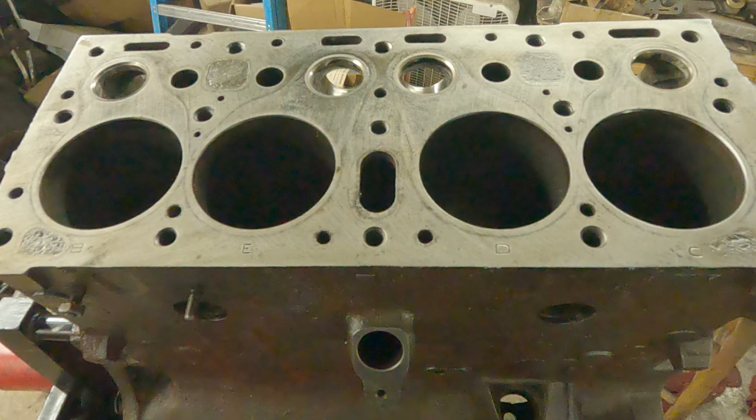Now we're going to go ahead and do the inspection. I've already inspected everything off camera, so I'm just going to go over the whole process on what to inspect and how to inspect it. Still got to do a little bit more cleaning up on this deck. I had it real nice and shiny, but even after a coat of WD-40 and some oil, it kind of dirtied up again.

The first thing we're going to do is check the deck for straightness, make sure it's not warped. Basically, get a straight edge and put it across in an X pattern, then put a flashlight behind it and see if any light shines through. If you're unsure, get the thinnest feeler gauge you have, like a 1/1000th, run it in there and see if it's all consistent. We'll do the same thing on this other axis here, checking about midpoint of the bores, right after the bores, and then just off the edge. So this deck's perfectly straight, which isn't very surprising. These engines run real cool, not a lot of heat or pressure going through them, and it's a real thick casting.

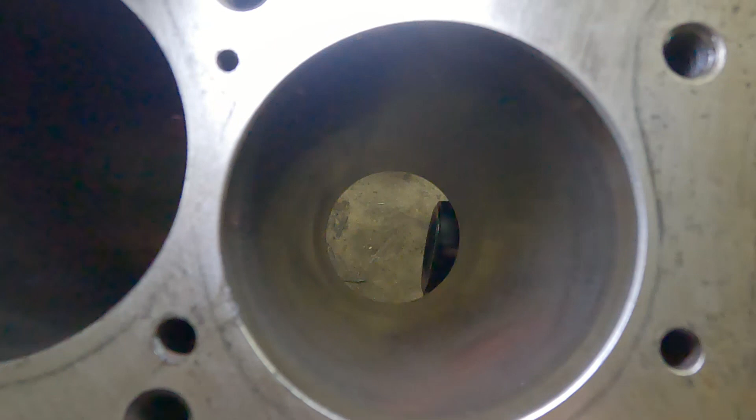Same process now for the bores, just with different lighting. So these bores got a little dirtier. Hopefully... these bores still look pretty good. They're a little dirty, and number 4's got a little bit of corrosion on it, but nothing crazy.

Oh, this damn tripod broke on me.

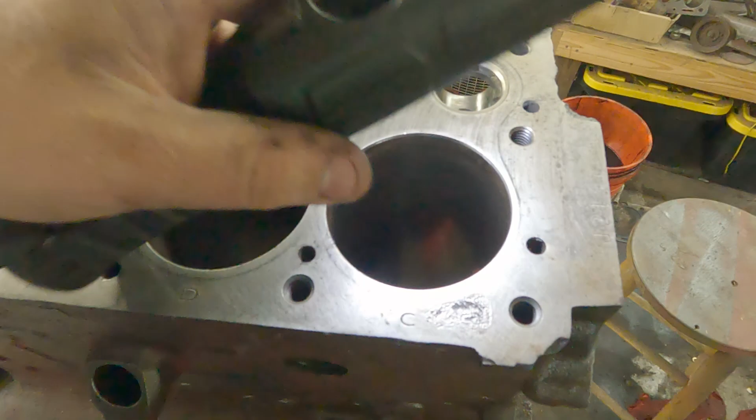Normally when you have a real high mileage engine with a lot of wear, you'll have a carbon ridge here - that's a buildup of carbon sticking out farther than the bore. Let me grab a piston to show you. Here on your piston, your top ring ends right here, so all this is dead space. When your piston's all the way up, only this part up here is exposed, and that builds up carbon. When that happens, depending on the severity, you can hone it out, but in most cases if it's real severe you have to get a ridge reamer. So yeah, these bores look good.

We're going to go ahead, before we start measuring, and inspect the crankshaft, the connecting rod bearings, and the main bearings, and then we'll do measurements.

Here we have the crankshaft, here's the rear. What you want to check for is excessive gouging. I already polished this crankshaft - it had a little bit of gouging, I never filmed it. But basically for wear, if your fingernail gets caught on it, that's normally a sign it's too much. We'll go ahead and do measurements on it as well, but I just wanted to show you this crankshaft's going to be good to put back in without having to take a visit to the machine shop.

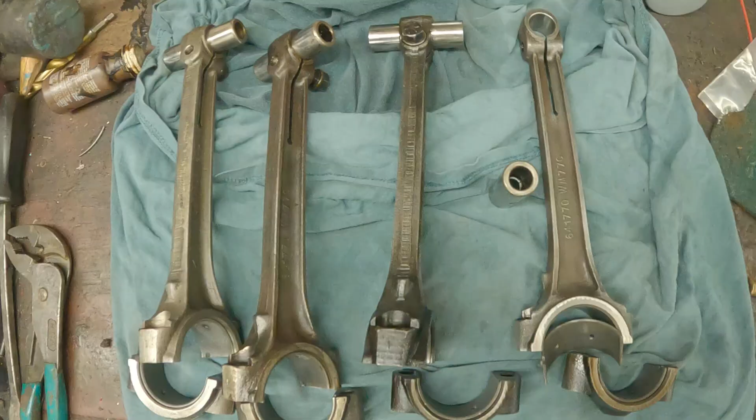All right, so here's our connecting rods. These just came out of the parts washer a little bit ago. Went ahead and cleaned this one twice - these are going to all get cleaned about 3 times. We will weigh these later, the connecting rods and the pistons, just to get a guess on how balanced everything's going to be. But we'll just do a quick bearing inspection.

So this is the rod, connecting rod bearing - this is the one that goes on the rod. Not too bad, looks like the oil was a little dirty. And here's the cap, so this is the bottom. You can see a little bit more dirt damage, no real heat checking or anything, just seems like a lot of debris in there.

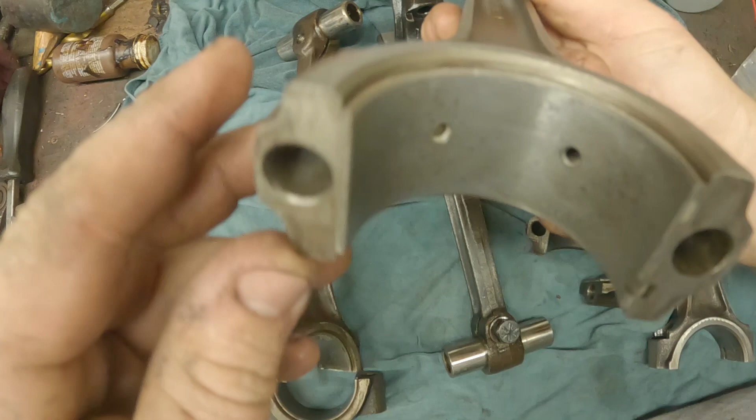And then on number 2, we got a little bit of flakes going on. So it seems like this was a little bit in between oil changes for a while, pretty dirty. And this bearing has a little bit of material missing on it. This one's number 4.

So, and also here's the cap for number 4. You can see where something drug.

But all in all, the crankshaft was okay. It just came out a lot better doing a quick polish on it. So to polish the crankshaft, I just used a buffer with medium fine buffing compound, then went over it with 1000, 1500, and 2000 grit sandpaper, and gave it a pretty good finish.

So moving on, here we have our intake valves. So here's one of them. You can see how much carbon buildup is on there, and also the valve face itself. Not a whole lot of wear on the valve face compared to the exhaust valves. These just don't see the higher heat like the exhaust valves do.

One of the big flaws with the L head and F head engine is, here's the exhaust valve, is the exhaust valve gets cooked in the block. All that heat just holds in the block, and the exhaust manifold's right there and everything. So these get pretty hot, but all the valves are getting replaced.

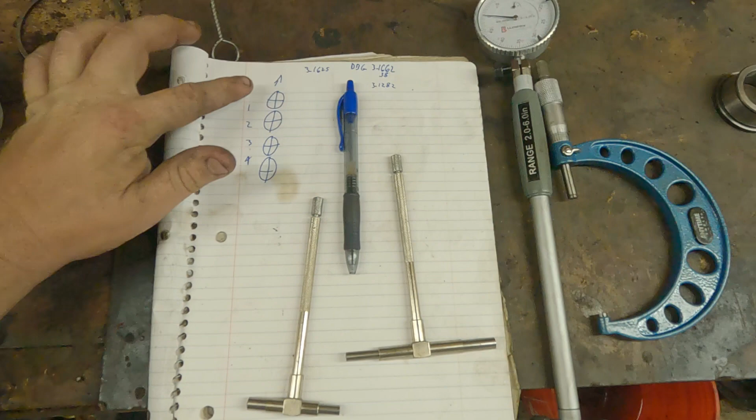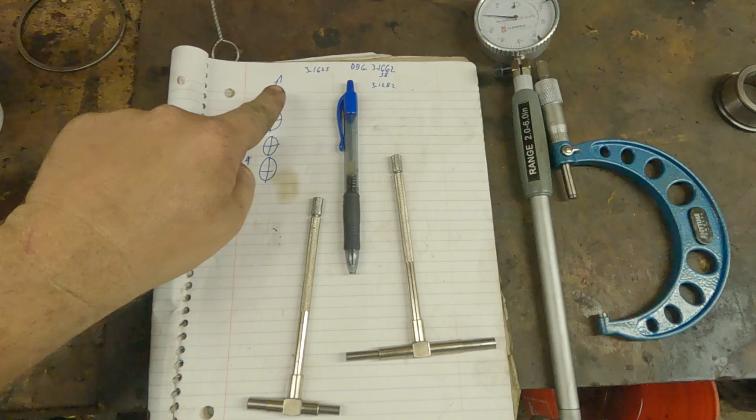Okay, so for measuring the bores, just get you a piece of paper. What I like to do is number it, and then I'll draw out the cylinders. I got an arrow facing front, so we're only going to take an X and a Y axis. So we're going to do top of the bore and bottom of the bore, so I'll add two more sets of circles.

Basically, the tools you're going to need at minimum are telescoping gauges. These come in different sizes, so just find the right size you need. This one's about a 2.5 inch to 3 3/4. These standard bores are 3 1/8, which is standard, so that'd be 3.125 on a decimal system.

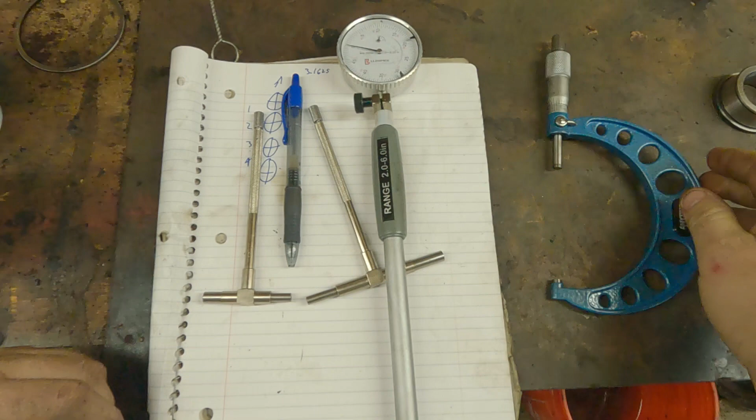Here is a dial bore gauge. You can use this as well if you have it. I'm going to use both just to verify the measurements, so we'll come back to this. And then also a 3 to 4 inch micrometer with a vernier scale that goes down to 10,000ths. That's very important, especially when we're doing the crankshaft and bearing clearances.

So basically the telescoping gauge, I'll demonstrate it again when we go to do it. You're just going to press it in, twist this, and it's going to spring out and hit the bore. You want to make sure it's perfectly straight. Then we're going to pull it out, measure it with the micrometer, reset it, do another measurement this way, measure it further down at the bottom of the bore, spin it. There we go. So we're going to have a total of 4 measurements per cylinder.

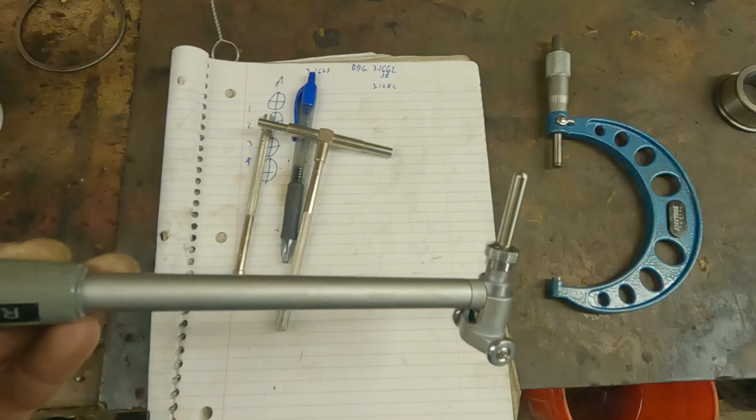So for the dial bore gauge, I'm not an expert on dial bore gauges, so if there's any machinists watching, I'm sorry. But basically you have the standard here. I got some spacers in here, about I think 50 thousandths larger, so I think it's 45, so it's 3.165. But basically what this does is it goes down, springs back, rides your cylinder, and then this is going to move. Your anvil is going to stay, and your dial indicator is going to move.

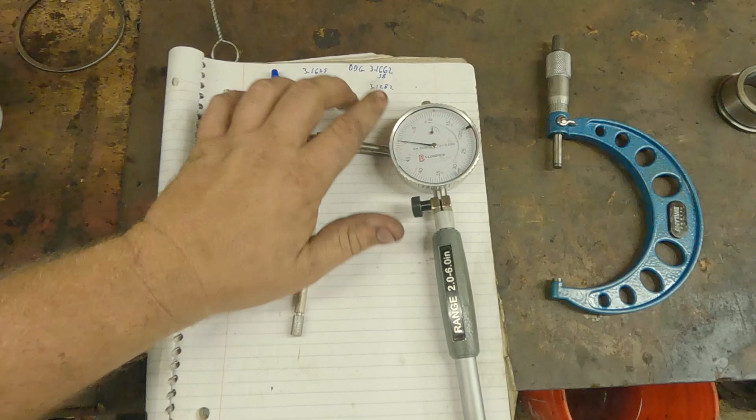So we'll go ahead and use this to confirm, we're just going to use both and I'll explain it. But basically, for me to get 3.125, this will read 40, so we'll subtract whatever this says off of 3.165. I got 6.6, it's about 1,000ths off. It was kind of hard to measure on the micrometer, but 3.165, and then we'll subtract that, and that'll give us our bore measurement, and we'll see if they all match up. So I'm going to go ahead and move the camera, and we'll get started.

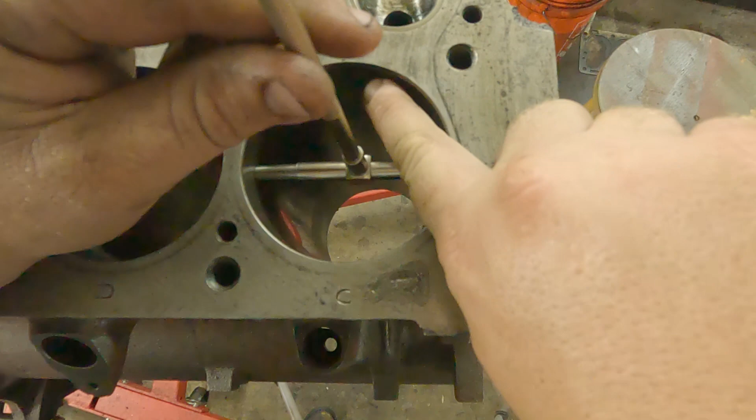Alright, so we're going to start with the telescoping gauge. We're going to get it in the center of the bore, spring it out, and make sure you go past the very top, because remember the very top is going to have no wear on it, or have a carbon ridge. So just go about half an inch off the top, make sure it's straight, move it around, make sure the spring isn't stuck. So we got it straight. It might look a little off center on the camera, but it's straight. And then we got it lined up with the center of the bore, so go ahead and tighten it up.

So now I got my micrometer ready, I'm going to try to do this on camera. It's just tight spaces. So on the telescoping gauges, you just want to do it till it clicks. You're going to use the thimble. So go ahead and lock her down.

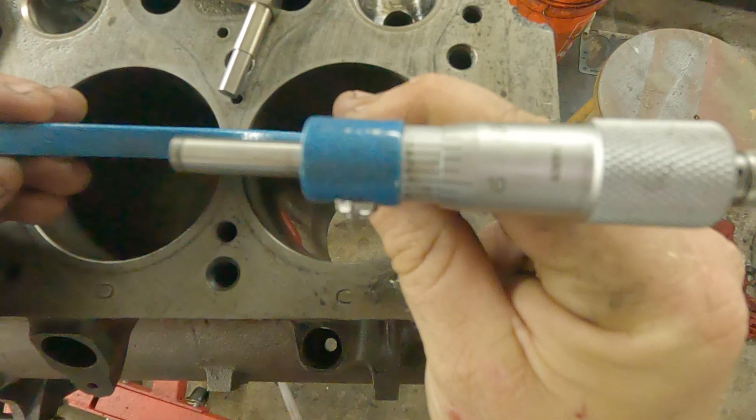So we got 3.12, we're in between the 6 and 7, we'll go ahead and round it up to 7. So 3.127, and then we'll check our 10,000ths. Oh shit, oops, pardon my language. Let me redo that, I thought I had it locked and I was wiping the oil off.

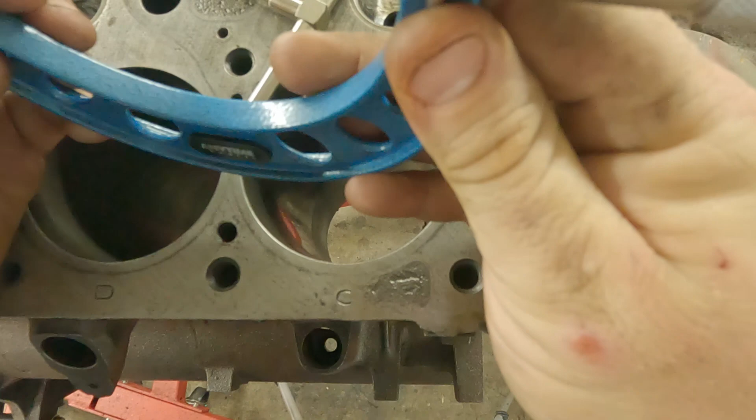It's just hard with the dang camera in the way. Here we go, let's see if it's the same. Alright, so yeah, 3.127, then our 10,000ths. So you'll see, hopefully, it looks smudged on my end. So you just find the line that lines up with your 10,000ths, so it's 8. So I'm going to go ahead and write that down. We got 3.1278, so that means we have 28 10,000ths wear on the bore.

So that's 2.8 thousandths. I'm not an expert on decimals, so that's really not that bad. You're allowed all the way up to 9 thousandths to run standard rings, or not standard, but the same size. So if this was bored 10 thousandths over, it'd be 135, so we'd be allowed up to 144.

So to use that same ring size, this is still standard, so it's going to get standard rings. It's going to be basically the same thing. We'll just do this measurement, I'll do it off camera.

Further down in the bore, you're going to see where the cross hatching gets a lot more predominant down there. That's where the piston stops its travel, so there's going to be no wear all the way at the bottom. You want to do it about half an inch up from where you see your wear mark, because you'll get a false reading if you go all the way to the bottom, and you'll think you have a real tapered bore when in reality you just measured the wrong spot.

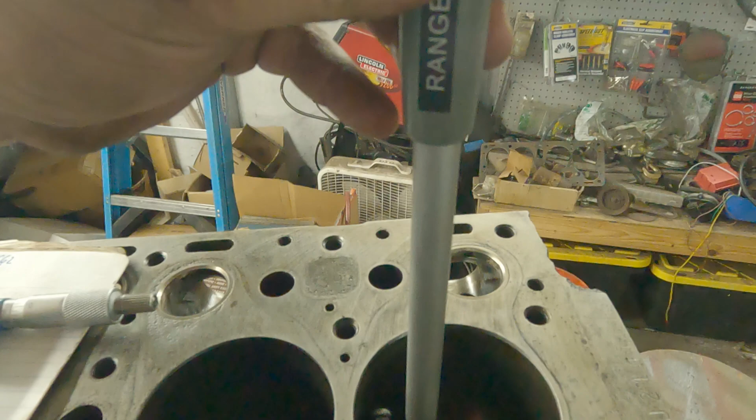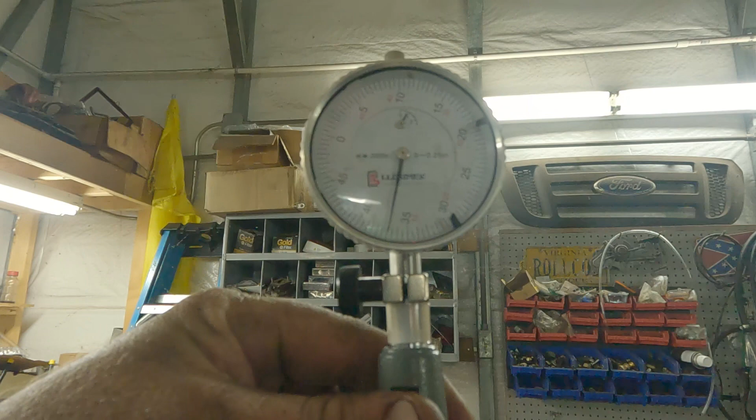Let me move the camera. Here we go, hopefully the glare is not too bad. So you're just going to move this back and forth, you'll see how I'm changing it. I'm not an expert at a dial bore gauge, I've always used telescoping gauges, but figured I'd get fancy and use one of these too.

So you can see how it's moving, we're going to go ahead and just hold it straight. It looks pretty straight. This is in half thousandths, so that's 35, then 35.5, and then 36, 36.5, 37. We'll go ahead and round that up to 37.

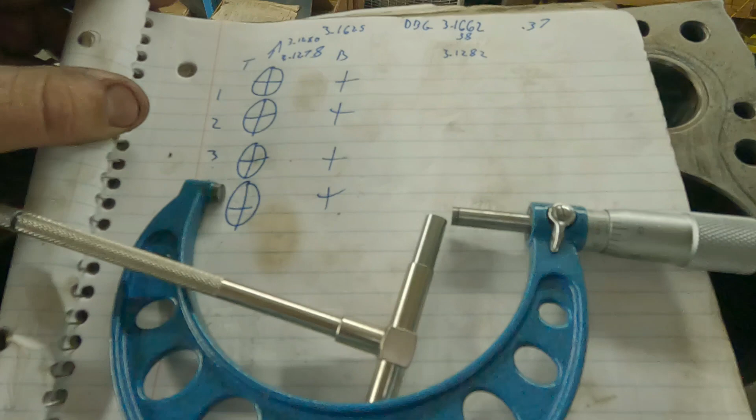We'll write that down and then subtract that from our 1625 and see if our telescoping gauge is close. So the telescoping gauge we got 3.1278, and the dial bore gauge, we rounded it up, so we got 1280. We're within 2 ten-thousandths, and realistically I rounded up, so both of them are right on the money. So we're roughly 3 thousandths of an inch wear.

Now I'm going to go ahead and measure the other axis, this way, and this is going to check taper. We're allowed 1 thousandths taper, which is pretty tight. That's not a lot, especially when you're talking about a circle, so if it's a little over we'll probably allow it. We'll go off our piston measurements too.

Alright, I'm just going to go ahead and micrometer it off camera real quick, speed it up.

That's not good, let me redo that, that wasn't a good measurement. Make sure everything's straight, you're in the center, and then roughly the same length down, about that half inch.

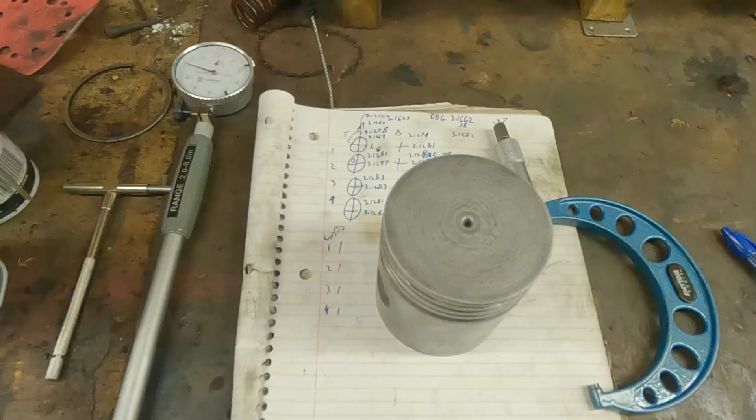Alright, I'm going to go ahead and measure the rest of them, and we'll go over the results. Alright, so I got the cylinders all done, we'll go over those measurements here in just a minute. But before we go over those, we're going to go ahead and measure the piston.

So real quick on a piston, your very top is going to be a different measurement than your ring grooves, and then also your skirt is going to be different. There's a slight taper to it, so I'll go ahead and demonstrate that now. The only measurement that really matters, in my opinion—this can vary—is basically the ring grooves.

Go ahead and take our micrometer. Now these are going to be smaller than your bores, so we'll just go ahead and lock it on the top groove. A little hard to do on camera.

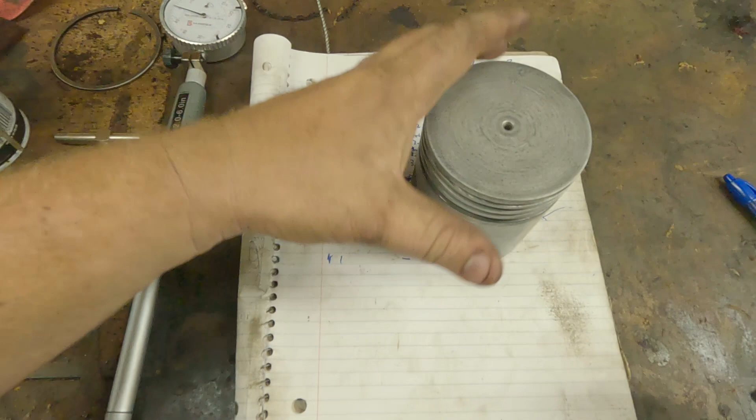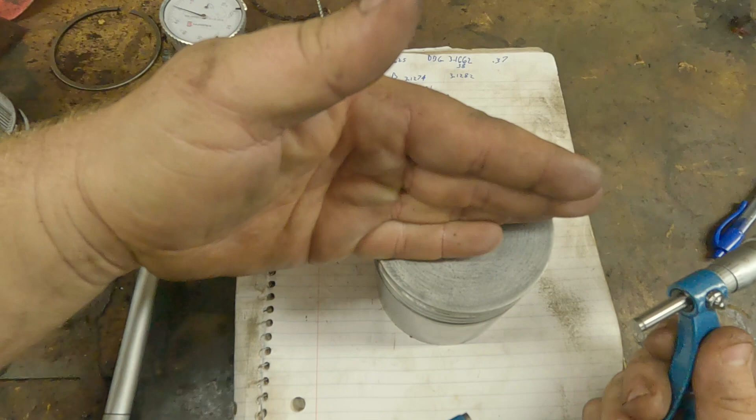You can just use the hole to line everything up. So this one is number 3. I went ahead and measured it, crap, I got to redo that. I forgot which way I measured it. So the wrist pin side, this is the front of the engine, the wrist pins are going to be this way. So that's going to follow our bore measurement. That's how I have it written on here, so when I'm looking at my bore chart, that's how it's going to read. Let me go ahead and redo this.

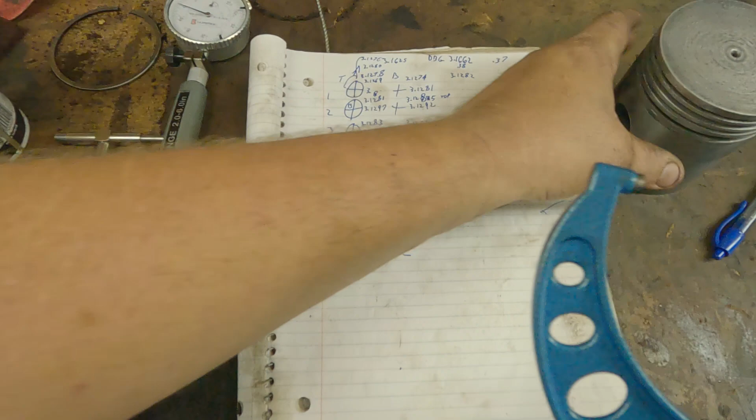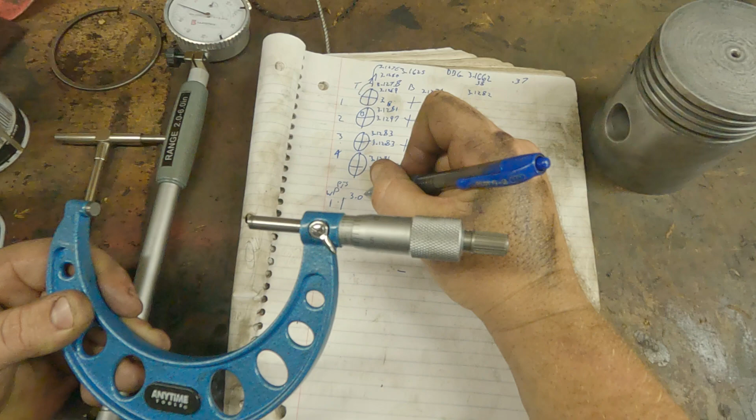I measured a couple of these. I haven't measured number 3 yet, but I'm starting this chart over from scratch just to demonstrate. Just move the micrometer back and forth a little bit, make sure we got a good reading. So that was the wrist pin side, so it's going to be this one. We got 3.077. Make sure I got that right. Yep.

Oh no, crap, that's number 3. Hold on. Alright, so that means we'll go ahead and take our measurement from cylinder 3 on that same axis. So we had on the top, we had, excuse me, 3.1283, we'll just call it 3.128. My math is terrible.

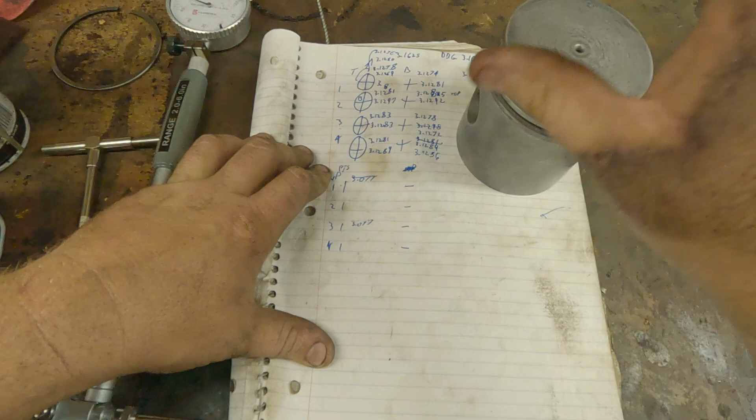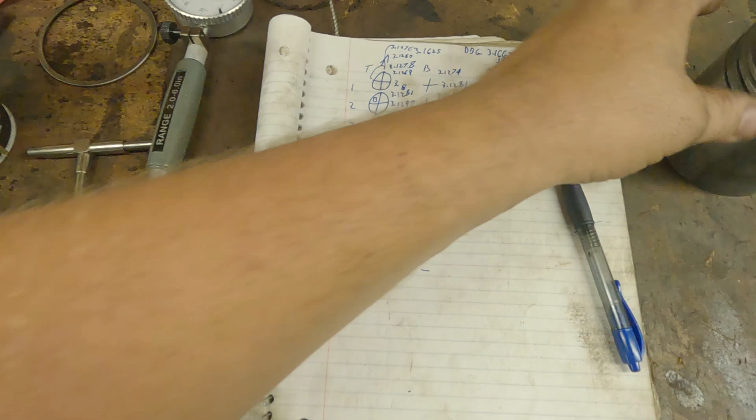So now we're done with the piston, and you'll just go ahead and do your other axis, so you have both. Which we'll probably just go ahead and do right now, so we can see it together. Like I said, I haven't done this one yet, because I'll go over in a second why I stopped. So this one we got 3.0678.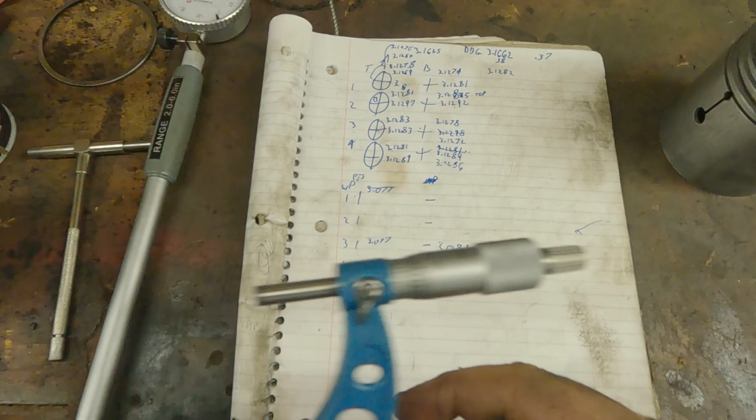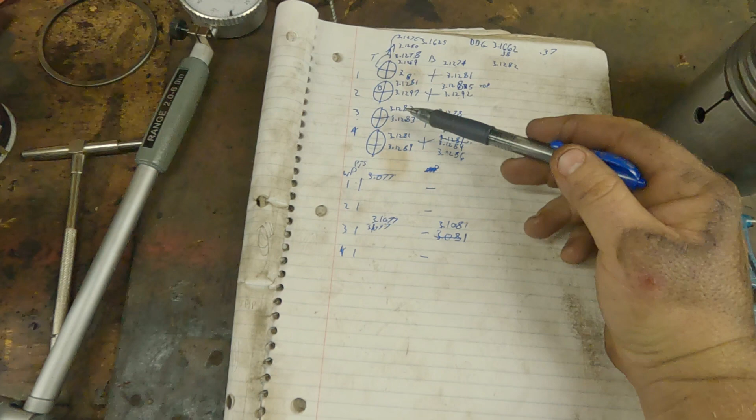I know this is probably pretty boring, but hold on, I missed a number. Oops, sorry about that guys. I screwed up, I read the damn micrometer wrong. Okay, so there needs to be a 1 in there. It's been a long day as usual. Okay, so now they're not 1/8 of it, they're not what I said. So we just take 128 and then minus 107, that's 27, right? No, 21. Yep, 21. So 21 thousandths smaller. If I'm wrong, correct me, my brain's fried today. But anyway, now you can see the difference on their piston.

So the rest of that gap's filled up by the rings springing out, and all that good stuff. So our out of round on this, we're at 4/10,000ths, which is actually damn close to what our out of roundness is on the bore. So we got 1283 and 1278, so that's 5/10,000, so we're good to go.

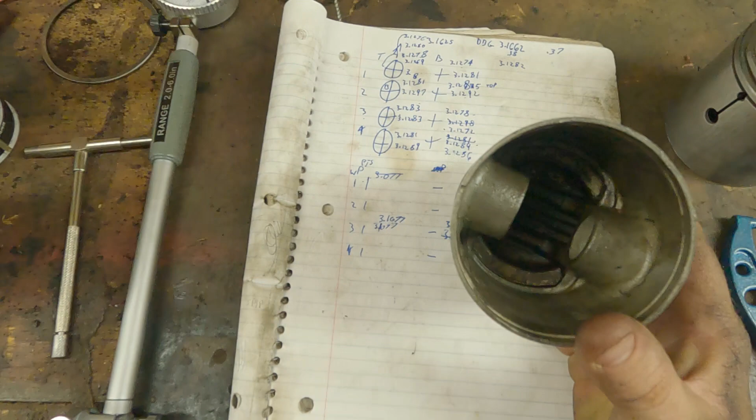It's been a hectic time, and I can't remember if in the previous video I mentioned the piston fiasco. So this is number 1 piston, notice the difference with it between number 3. Oh what's that, so this is a very old aftermarket piston. It's made by Alcoa, don't know if they're still in business, never heard of them. Some point in time in this Jeep's life, it's had a piston replaced and also a connecting rod. When we go to weigh the connecting rods to go over, there's basically a remanufacturer stamp on it. They're Willys, they're all Willys connecting rods, but this piston's aftermarket. So this is telling me that this thing's had a piston put in it for some reason, and also a connecting rod, and it was number 3 connecting rod. So it doesn't really make any sense.

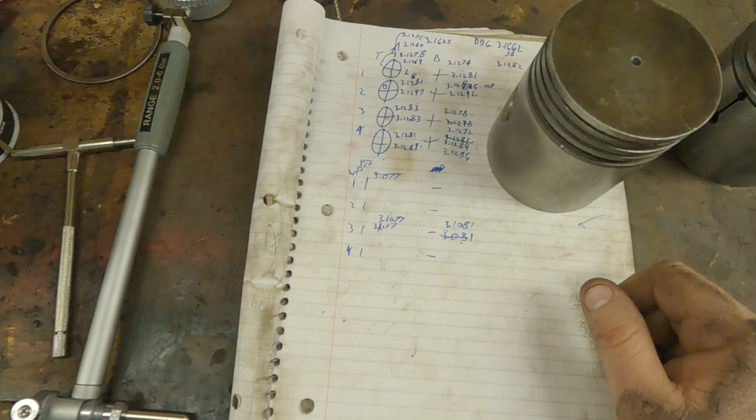I talked to the owner and his father - apparently they've had it since 1964, so basically new, it's a '59. So I guess sometime in those 5 years of them not having it, this thing had a catastrophic failure. Also, the crankshaft's been machined - we'll measure it, but it's 20 thousandths undersized on the mains and 40 thousandths undersized on the crank pins for the connecting rod. So the crank's been turned, there's been a piston put in it and a connecting rod. So something happened.

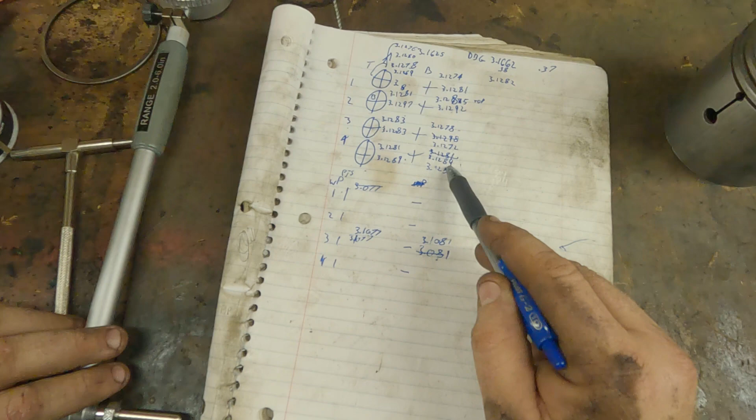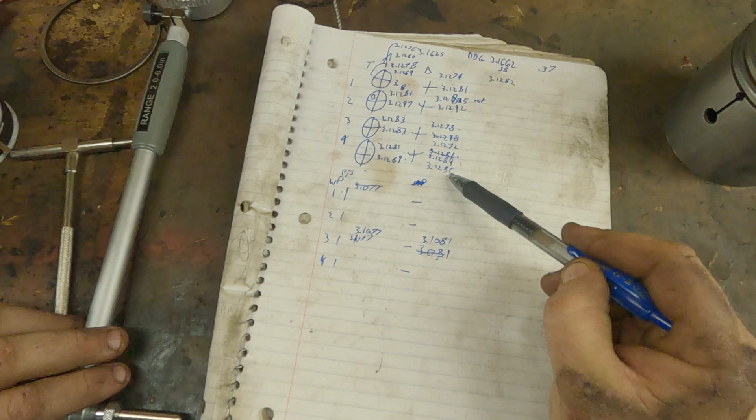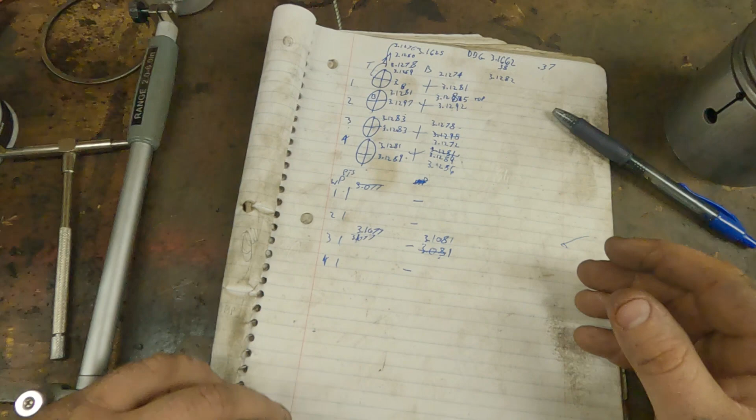And our pistons are matching up pretty good, so those rings are gonna - I'm using old standard cast iron rings, I'm not putting chrome rings in. I think chrome on these bores is going to be a little too hard, especially with us not getting them machined, because I don't justify getting them machined and bored out thousandths. But anyway, that's basically what I do.

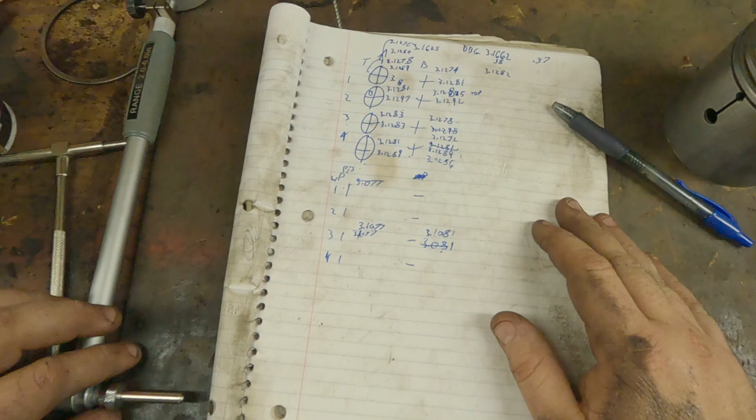So now we're going to go ahead and do the fun part, and that's doing the crankshaft. I'll draw it up on the paper, but we're going to check overall diameter and also out of roundness. The maximum allowable is 1 thousandths out of round, which is also a very fine number.

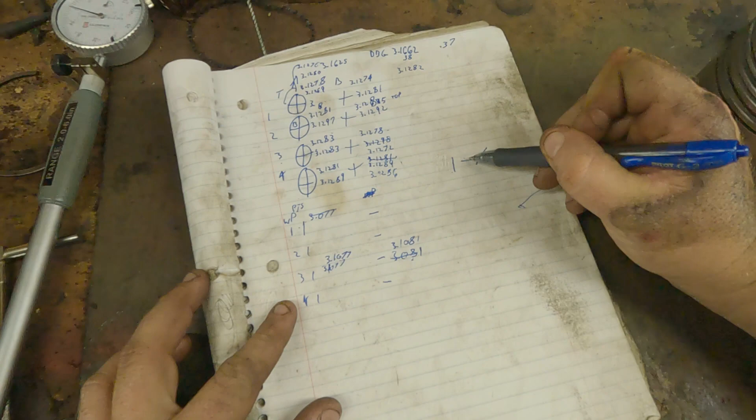So you're going to take a measurement here, measurement there, measurement at 45. I'll just go ahead and draw it out on the paper - like I said, I'm running out of space and battery today. You're going to take two 90-degree measurements, and then a 45 and another 45, so you'll have 4 measurements per journal. There's going to be a lot of miking to do.

I've already done it, so I guess we'll just walk that through real quick. Reading the micrometer is going to be the same way we did for the bores. For these you're going to use a 1 to 2 inch mic for the crank pins, and on the mains you can use a 2 to 3.

Now with my stand to measure the mains, I just stood the crankshaft up. I'm not going to do it on camera because I already did it, and it was kind of wobbly and everything, with the dowels - because I don't want to remove the dowels and risk cracking the flange. There's no reason to remove them. We're just going to go ahead and turn it.

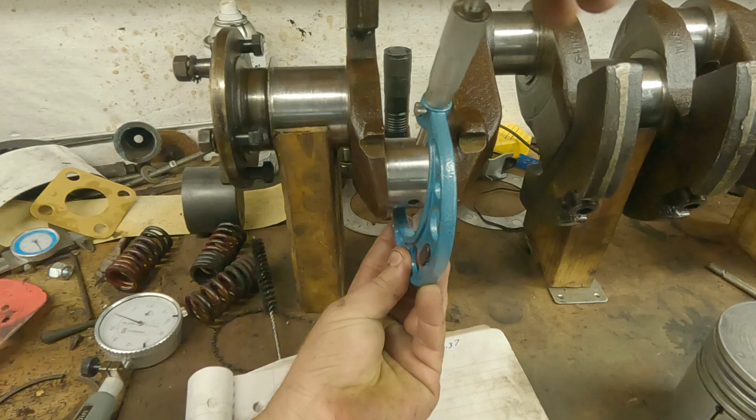And I got the wrong mic there - go ahead, 2 to 3, not the 1 to 2. So just take it till it stops, you'll hear that click, because if you don't use the clicker and do this, you risk nicking the crankshaft, and also you can stretch out the frame of the micrometer.

So that would be this measurement when you draw it out. So alright, these are all my measurements. We're doing the crank pins first, so we'll take number 3 crank pin - the other one, I measured number 4 just now. So we got 1.8978 on one axis, and on the other we got 1.8971. So we got 7 ten-thousandths out of round. So we're still within spec.

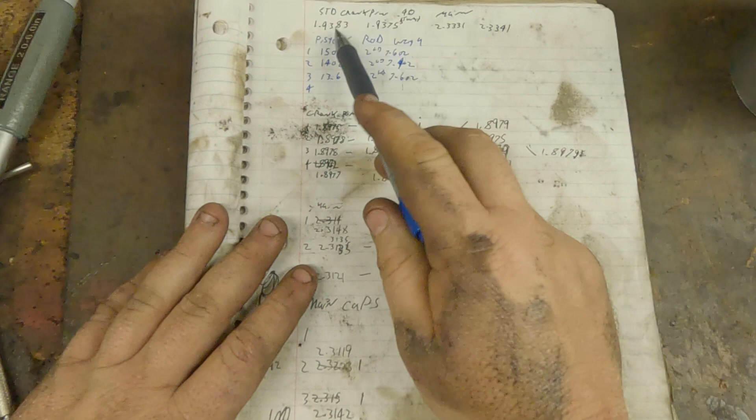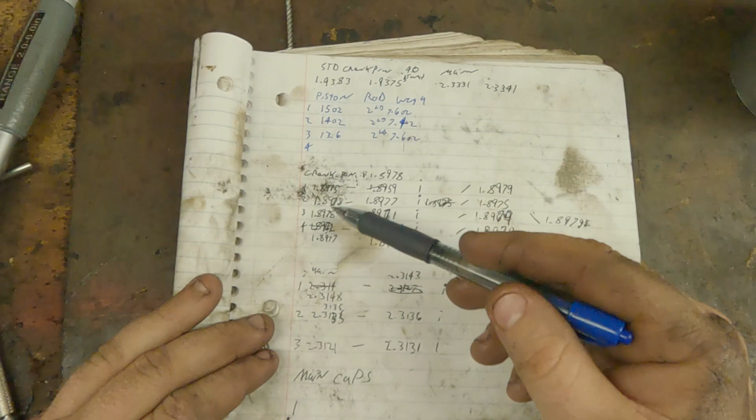So now the factory standard crank pin ranges from 1.9383 to 1.9375. That means if we take that, it's been cut down 40 thousandths. So there's been 40 thousandths removed on this crankshaft from standard.

Also, these old bearings have a rubber stamp that says .40. So these would be a 40 thousandths undersized bearing, meaning 40 thousandths smaller than stock.

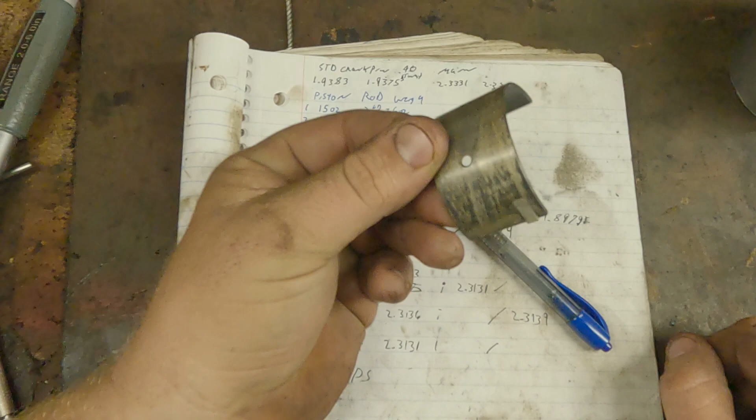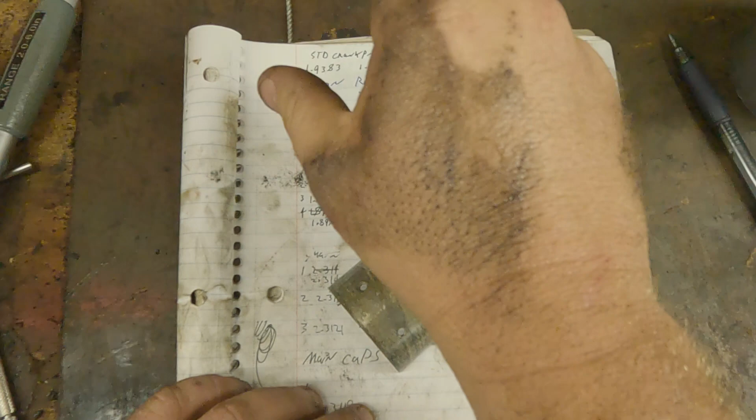So yeah, if you can't read the stampings on your bearings, mic your crank and subtract that from the standard spec, and that will give you how much the crank's been machined, and get the correct undersized bearings. And then for your mains, standard from the factory is 2.3331 and 3341.

So you got 1/1000th - they vary 1/1000th from the factory. On that we have 2.3148. That means it's been cut 20 thousandths. So we have a 20 thousandths undersized main bearing.

So now the next thing we're going to do, since we're on the crankshaft, now that hopefully you guys know how to measure the crankshaft, you're going to take 4 measurements: 1, 2, 3, 4.

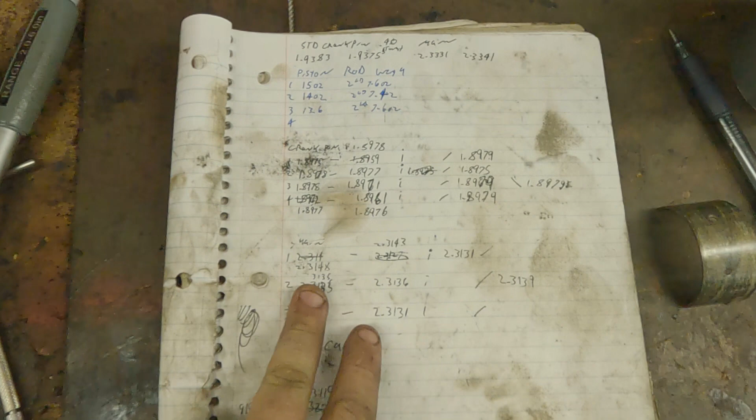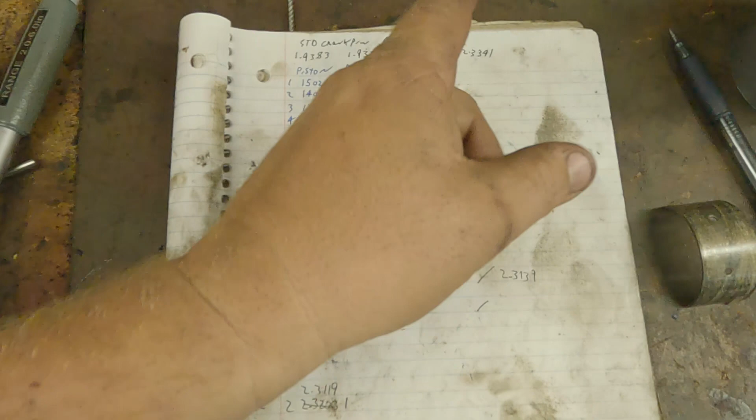Okay, so we're going to measure the main caps. I had the main caps installed, torqued with the old bearings, and we're going to measure those. You don't have to do this, but we're going to take our actual measurement off the crank and the measurement of the bearings, and that's going to give us our oil clearance. So it's going to give us a good judgment to make sure our measurements are all within spec, and also the oil clearance.

If the oil clearance is way out of whack, that means you measured something wrong, or the bearings are just that worn out. We'll do a bearing inspection when I flip the motor over, and we'll do that next.

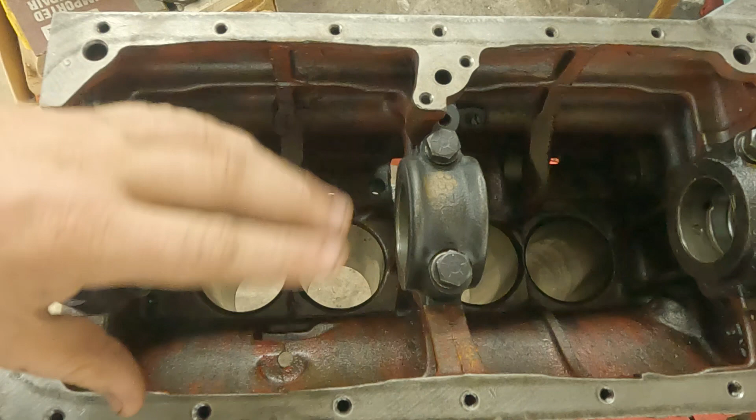All right, so now I got the engine turned over. Now we're going to check the - this is strictly optional, I'm just showing you how to do it. So if you want to, just double check everything. If you're not getting the crank machined, you can check your oil tolerances

by measuring the inside of the bearing, and then subtracting your crankshaft measurement by your main cap measurement, and that difference will be your oil clearance.

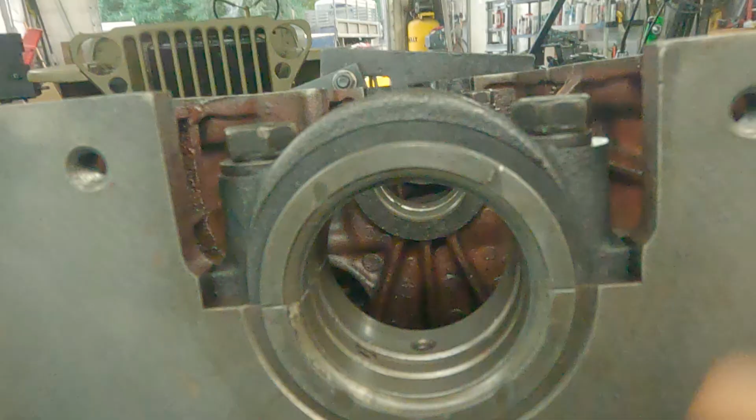All right, so it's going to be the same principle as measuring the cylinder bores. You're just going to take a top and a side measurement. Your oil supply holes are going to get in the way, so you really just got to take one measurement. It's kind of a reassurance baseline thing, because these bearings are getting replaced, and the tolerance is going to be tighter from what we measure because of the new bearings.

So another thing, if you take it to a machine shop, they can line bore it, make sure it's all perfectly straight. If you did have a little bit of twist, it could be bored out with a line bore. These things are pretty stout - I've never seen one where the crank bound up and all that stuff.

But all right, I'm gonna just go ahead and measure it off camera real quick, and we'll go over the measurement, then we'll move on to check out the tappets real quick, and then weigh the connecting rods and pistons.

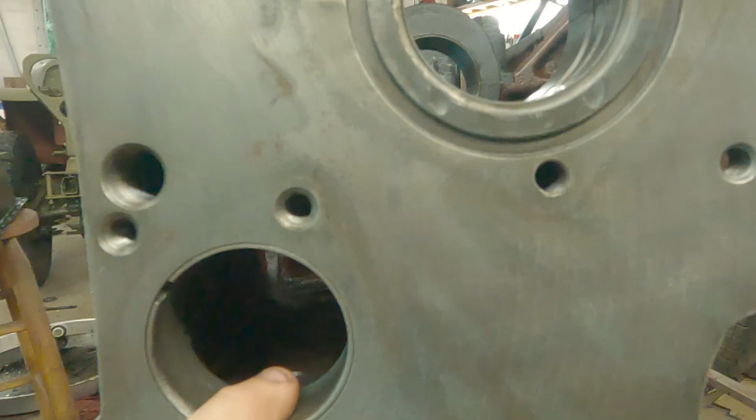One thing I forgot to mention, also the cam bearing. There's only one cam bearing on these. If it's got multiple cam bearings, that means it's been line bored and bearings added.

If you have low oil pressure issues and you tear the engine apart, and the crankshaft oil tolerances for the crank and the connecting rods are fine, then most likely you've got a pretty worn out cam bearing or the journals that it rides on. If that's the case, it'd have to be machined and then bearing inserts installed to tighten that up.

Checking that's going to be the same way. Just measure it, and then you can just measure your journal that the cam rides on.

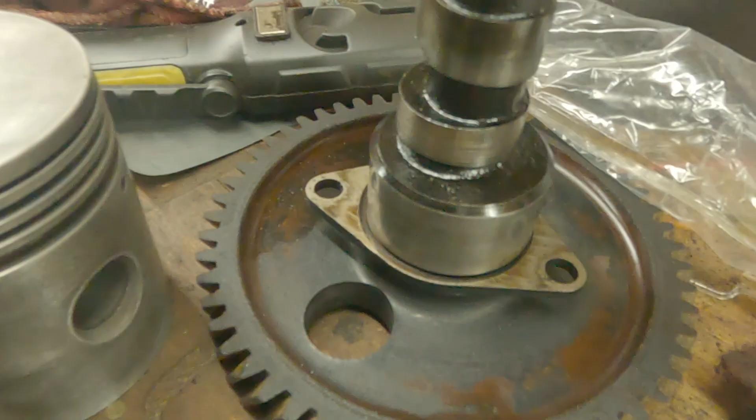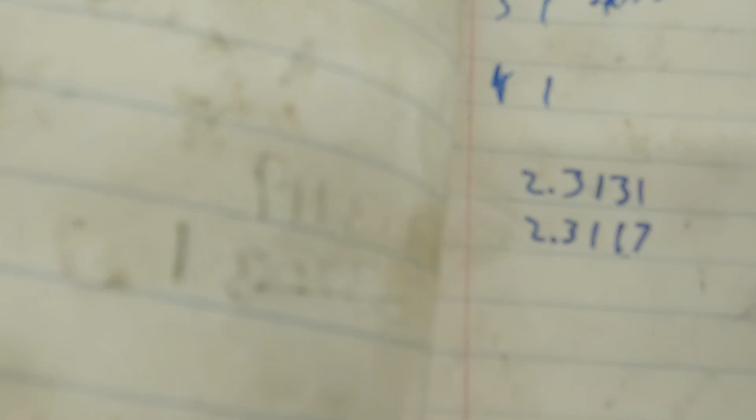All right, so I just rewrote it, but our actual crank main journal measured 2.3131, and our bearing cap measured 2.3117. So that's 14 10,000ths of oil clearance. Hopefully I wrote that right - no, too many zeros, there we go.

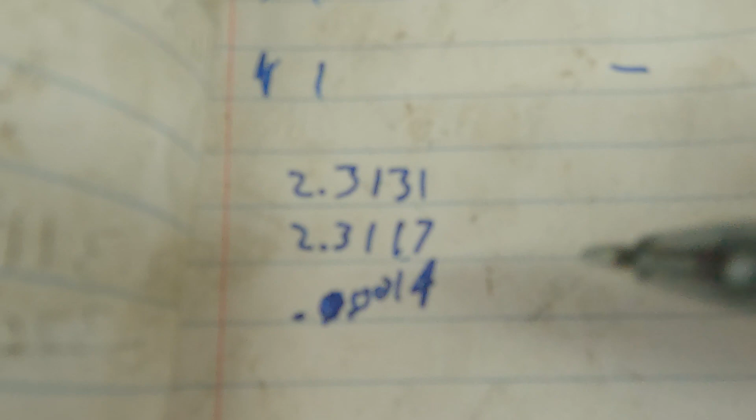So we're well within spec. There's a wide range - the spec is 3 10,000ths to 29 10,000ths. So you're basically looking at thinner than a frog hair, all the way up to almost 3 thousandths. That's a huge span. That's pretty dang tight, especially with some wear on the engine. That's really good, and we will confirm that with Plastigage when we get the new bearings installed.

So what this Plastigage does is, in the assembly, I'll do it again just in case y'all don't watch it: you cut a strip of this and put it on the crank journal, then clamp down and make sure everything's dry, torque down your main cap, then remove the main cap, and you just see how much the plastic's been crushed, which tells you the bearing clearance.

Ideally the smallest this goes down to is a thousandth. So if we hit a thousandth or smaller, if it goes under that, then we're good.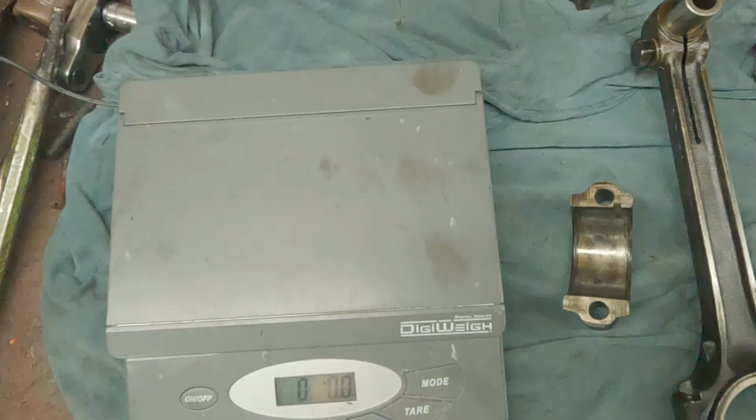All right, we'll go ahead and check out the pistons and connecting rods, and then the tappets. So I got the connecting rod stripped down, got the cap bolts removed, left the pin and the bolt in.

We're just going to do that so I don't lose track of the pins - it's one less thing to keep track of. As far as miking the pins go, if you had a real small inside bore gauge to check the connecting rod, you can, and then check the outside diameter for taper. But really the only part of the pin that's going to see any wear is the outside, where the piston rotates back and forth, and they're aluminum, so there should be no wear on these pins at all.

As far as weighing them goes, you don't have to, but this is something, if you want a real smooth engine, it's good to know the weights just to make sure - keeps down on vibration, crankshaft harmonics, stuff like that, and just overall a better running engine.

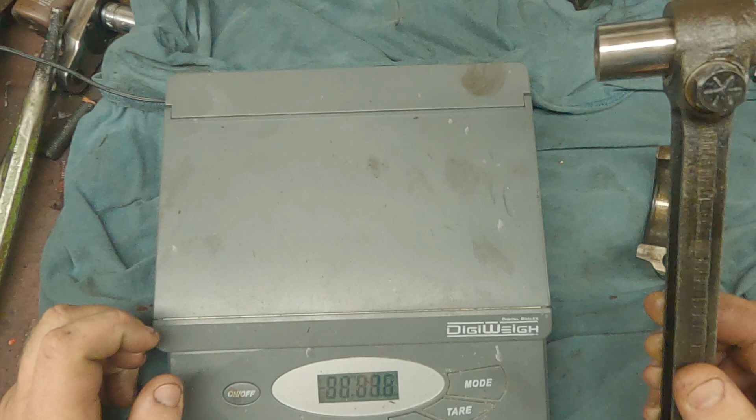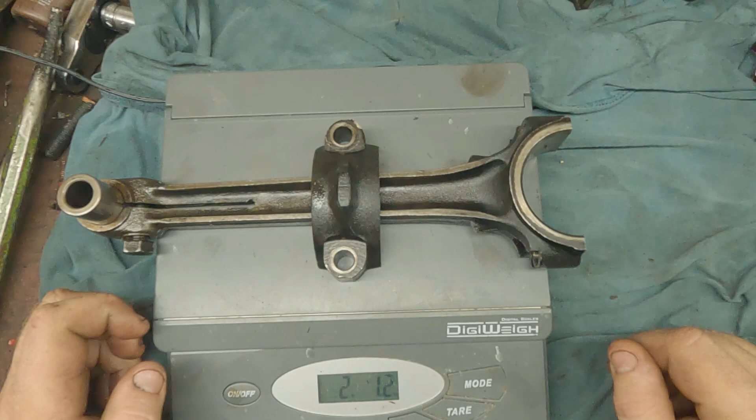So we're going to start with number 1. Oh, scale timed out. There we go. So we're going to go ahead and put the cap on too. We got 2 pounds 12 ounces, I think. Yeah, 2 pounds 12 ounces, so I'll go ahead and write that down - 2.12. All right, we'll get number 2.

Actually, we'll just grab number 4, it's right here - number 4 main cap, or connecting rod cap. So we got 2.10.

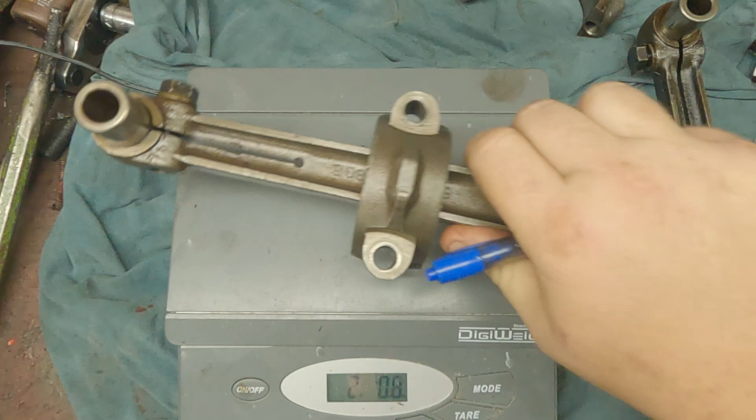Number 2. Let me check that one again, that one's a little light. Okay, 2.8. And then number 3... 2.12.

All right, so we have number 1 and number 3 at 2.12, number 4 at 2.10, and number 2 at 2.8. So between our high and our low, we're within 4 ounces, which is good.

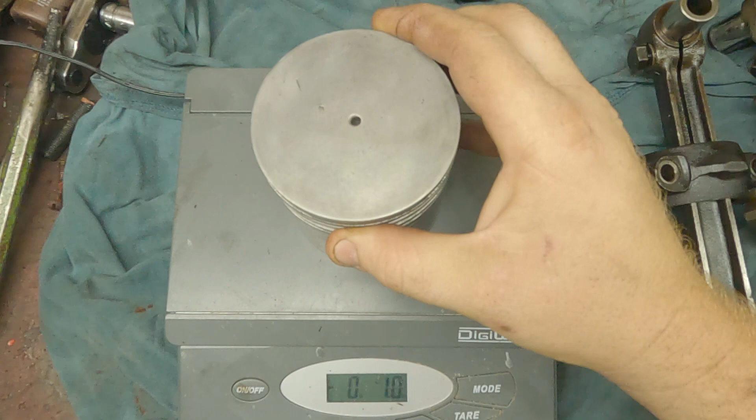All right, we'll go ahead and do the pistons. We got number 1 - hold on, let me make sure this thing's zeroed. Yeah, see, it's not zeroed. 13.4 ounces, number 1.

Number 2... 14. Sorry about that, I had a phone call. Number 3... 13.6.

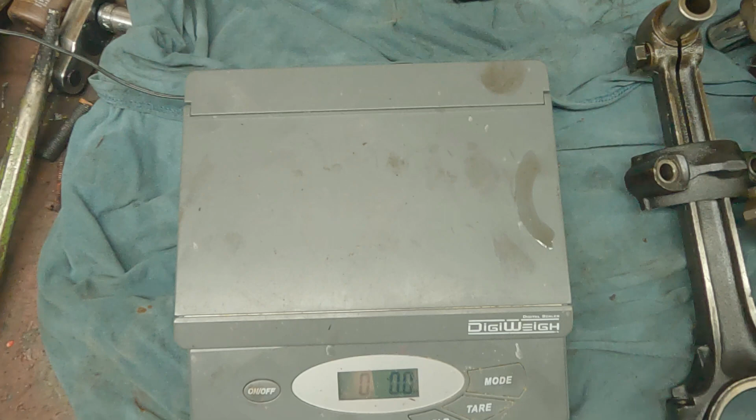Another thing too, while we're weighing the pistons - if you really wanted a perfectly balanced engine, you could add weight to them or remove weight, whatever you see fit. With the pistons you really don't want to reduce weight, but you can put weights like solder in - I've seen that done before. But our high was 14 and our low was 13.4, so we're within 0.6.

The reason also I'm doing this is because this is the number 1 that came out of it, this is the aftermarket piston. We'll go ahead and weigh that - so that one's 15, so that's 1.6 ounces heavier.

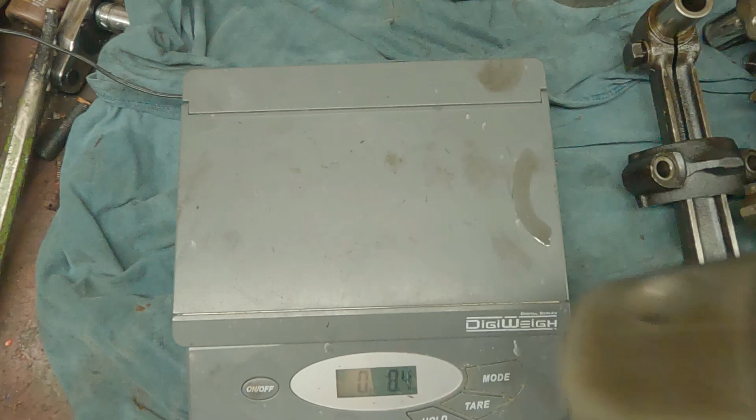I know we're only dealing with ounces, but you got an engine spinning upwards of, you know, 4,000 is the red line on it. That can matter, especially with how long the stroke is and how heavy these rods are - look how long that is. You know, a small block V8, like a 4-inch bore, 4-inch stroke, like a 400 - a 350 Chevy or 351 Ford, 4-inch bore and a 3.5-inch stroke - your rod's only that long. So you can really see the size difference. I don't have any small block V8 stuff to show you comparatively because it's pretty popular.

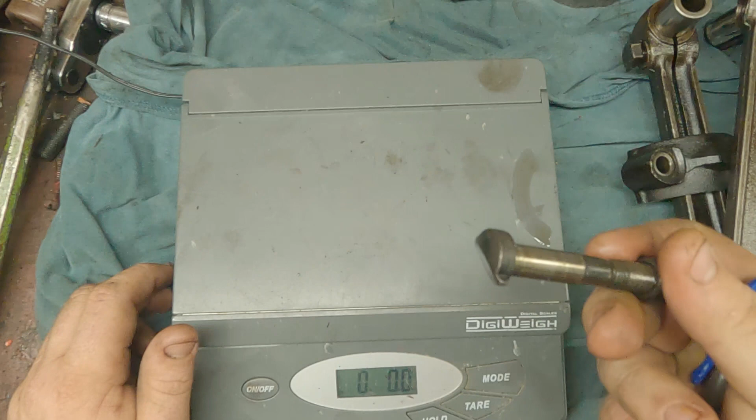But yep, all these are good, I'm happy with them, there's no reason to take any weight away or anything. I didn't measure the bolts - kind of irrelevant, they should all be the same. We're dealing with fractions of an ounce probably of a difference. All right, so one last thing to do on the inspection is the tappets.

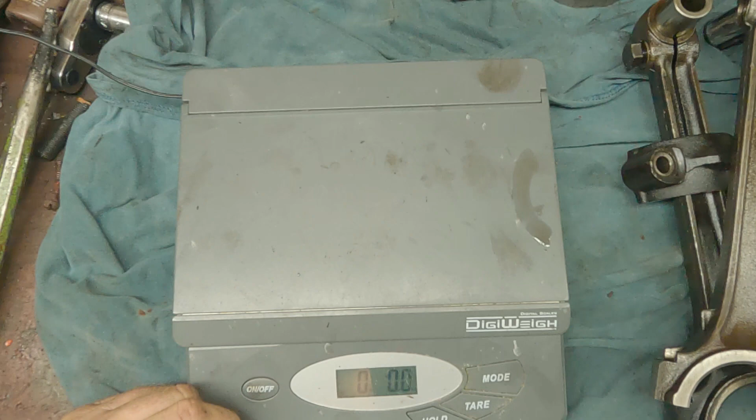So you can see I got all the tappets and push rods in here. This is my patent pending tappet lifter push rod organizer.

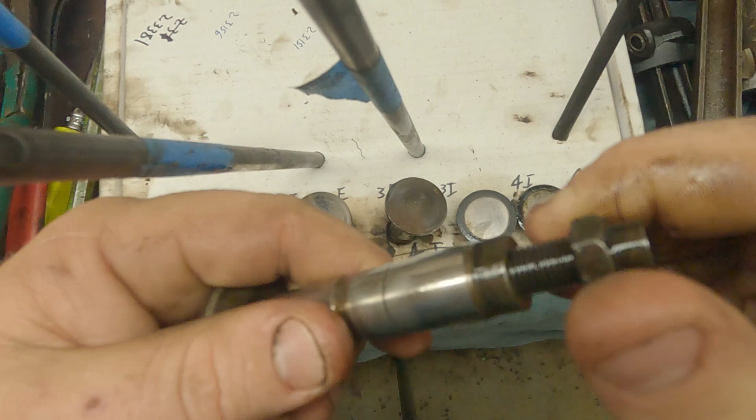These adjusters do back all the way out. So there you go, you can kind of see it's like a split bolt setup, and you want to clean inside there with a brush.

There's no escape for oil and crud, so you got to make sure you clean it real good, pour it out, clean it, pour it out, etc. And then reassembly is just going to get a little bit of light oil on the threads and then screwed back in.

So when I clean them again, I'll go ahead and do that. So here we got an intake. This one has not been cleaned.

So the intakes are non-adjustable on the F-head because you adjust it at the rocker arms like a conventional overhead valve engine. Our push rod pocket looks real good. Just some dirt in there that's going to clean up real nice, but the actual surface looks good, and also the cam surface. So that's basically all for the tappets.

And push rods, obviously you want to make sure they're not bent, so get a flat surface and roll them. You might just put them on the end of a table because you have this bell end here, so do it that way. If you try to do it otherwise, it's not going to be level.

So here's the actual mating surface that goes into your tappet. That looks real good. And then also the cup where the rocker arm pushes down into.

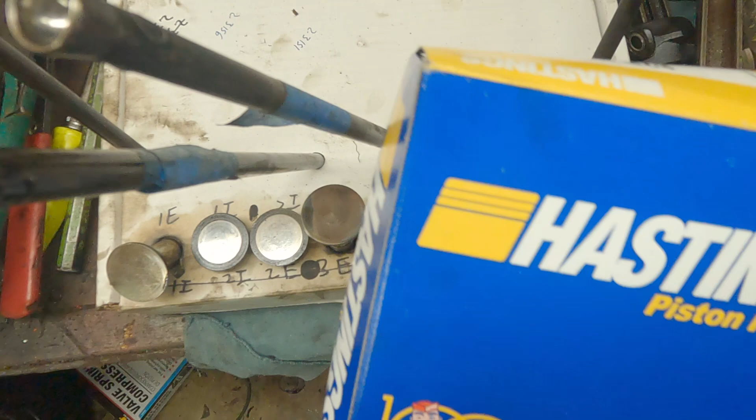Also Hastings piston rings, made in USA in Michigan. Last I checked, these just came in today. These are March of this year production. They used to come in a rectangle box with individual pockets. Now they just throw them in these bags, which I'm not a huge fan of.

But we're just using regular ductile iron rings. We're not doing chrome rings, especially with the bores being a little worn. They're not factory, you know, they're not fresh bores. So we want to just use iron rings.

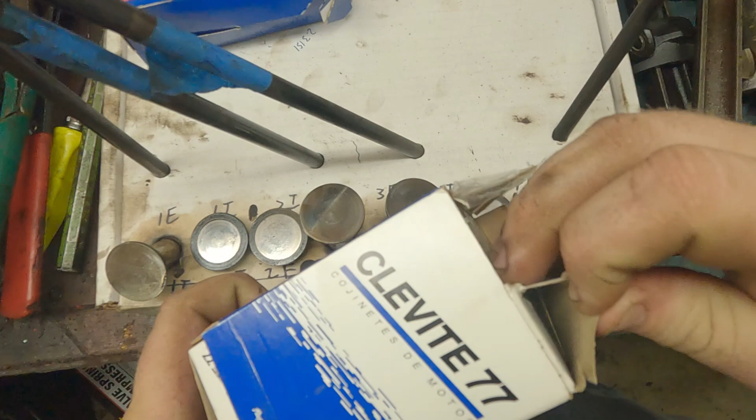And then here's the connecting rod bearings. I'll go over these again in the reassembly, but you can just see the quality on these Clevite bearings. They got a real nice surface, made here in the USA. That's the last two engine builds I've done, I've used Clevite bearings and they've been good.

I have Sealed Power in my original CJ5, and they seem to be a little bit softer because I had to pull the oil pan off at one time, and I did a bearing inspection on it, and I wasn't very happy with the results. But anyway, that'll be more detailed in the assembly video.

We're going to start on the assembly video. We're going to start off with the bottom end. We're going to work from the crank up. So it's going to be a lot of fun.